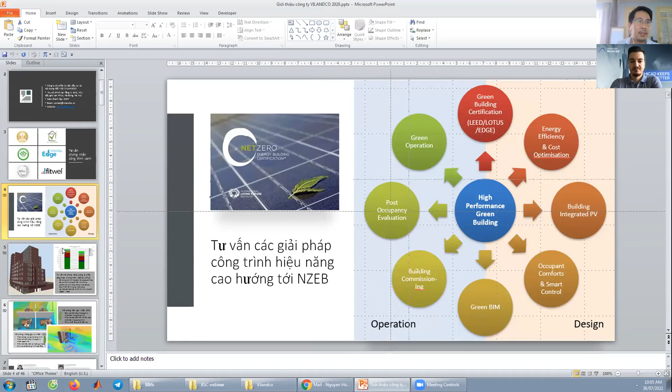Giới thiệu qua thôi, bởi vì buổi ngày hôm nay xin phép để dành cho phần trình bày của chính hãng.

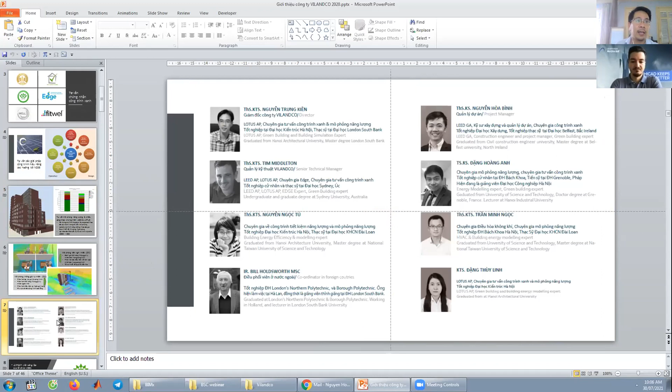Mọi người có thể thấy trên màn hình anh Nguyễn Trung Kiên là giám đốc của công ty, cũng là một người khá có tiếng trong lĩnh vực công trình xanh. Anh đang là một trong những thành viên sáng lập cho tổ chức VGBC, tham gia vào rất nhiều hoạt động về công trình xanh của Việt Nam.

Trong các dự án công trình xanh của công ty đã thực hiện, mọi người có thể thấy có những công trình của Capital House, của Sao Thái Dương và nhiều tổ chức khác nữa. Chúng tôi có rất nhiều đối tác trong lĩnh vực này, nổi tiếng như Heerim, như Obayashi, và các đơn vị khác.

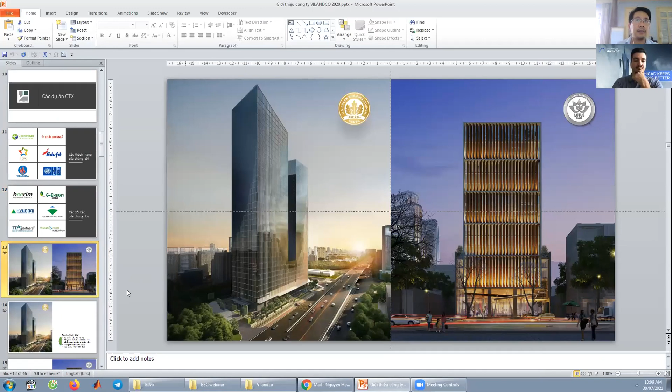Đây là một số công trình mà phía công ty đã tư vấn cho chủ đầu tư, áp dụng thành công và đã đạt được các chứng chỉ. Mọi người có thể thấy đây là tòa nhà North Star ở khu vực Liễu Giai, Hà Nội, vừa mới được chứng chỉ xong.

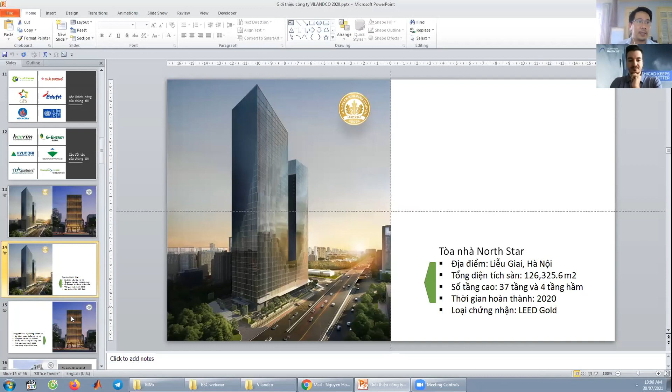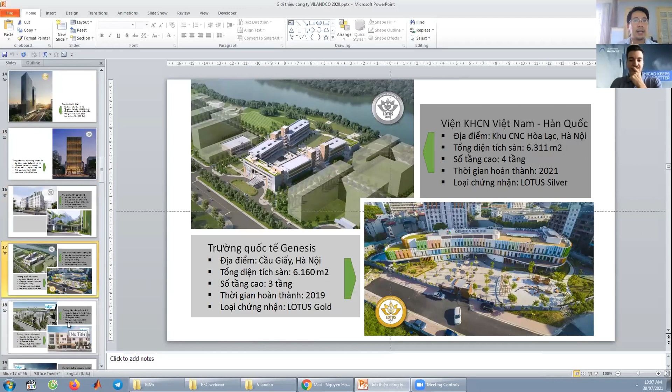Hay là Trung tâm Lưu ký chứng khoán Hà Nội ở đường Hoàng Quốc Việt, đây cũng là một công trình thành công của công ty. Ngoài ra còn có rất nhiều các công trình khác. Để tiết kiệm thời gian cho buổi họp ngày hôm nay, tôi xin phép chỉ show lên trên màn hình. Mọi người có thể tìm hiểu thêm thông tin ở website của công ty là vilandco.vn.

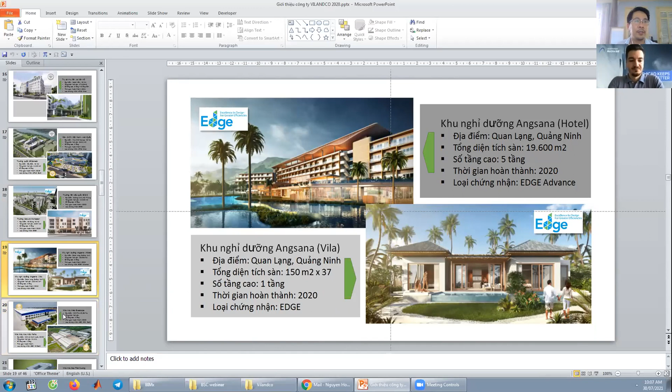Ngoài ra, bên cạnh lĩnh vực về công trình xanh thì Vilandco còn có một mảng công việc khác liên quan đến phần đại lý của một số phần mềm, đại lý phân phối và đào tạo một số phần mềm. Nổi bật trong đấy có các phần mềm của hãng Graphisoft như là Archicad, BIMx và BIM-Cloud cho lĩnh vực công trình xanh và tính toán năng lượng cho công trình.

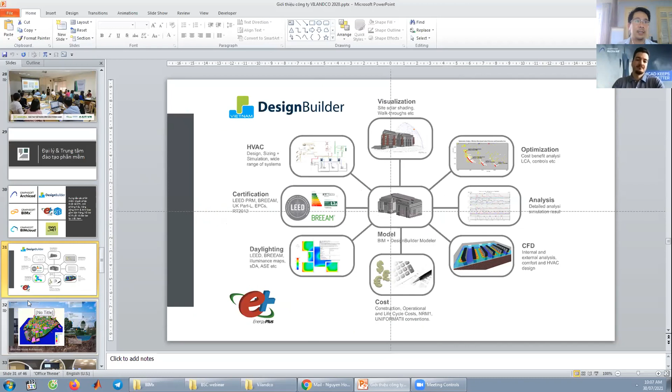Thì có các phần mềm như Design Builder hay là Energy Plus. Phía công ty vừa phân phối vừa có các chương trình đào tạo cho các phần mềm này. Xin phép đi rất nhanh qua lĩnh vực này thôi.

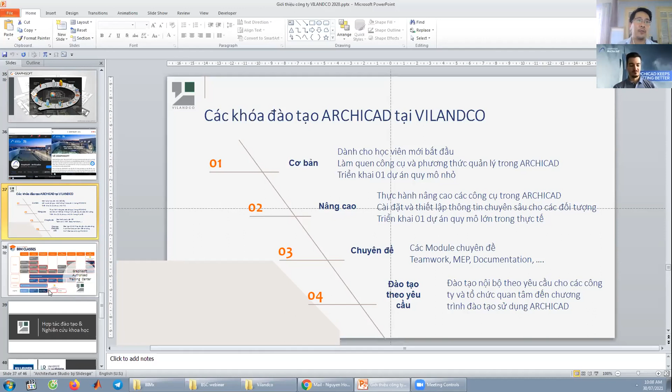Ngoài ra công ty cũng có các khóa đào tạo liên quan đến các phần mềm như Archicad, liên quan đến phần mềm như Design Builder. Thông tin chi tiết vui lòng xem ở trên trang web của công ty là vilandco.vn.

Nói sơ bộ về công ty như vậy, để giới thiệu là chúng tôi có làm trong lĩnh vực công trình xanh, có làm trong lĩnh vực tính toán năng lượng hiệu quả và cả trong lĩnh vực về BIM cũng như các phần mềm về BIM tool như là Archicad.

Để không mất nhiều thời gian của buổi ngày hôm nay nữa, tôi xin phép sẽ nhường lời cho anh Sandor, chuyên gia của Graphisoft, về các yếu tố mà tôi vừa kể trên.

Hi Sandor. Hey, hello. Yeah, I've just finished a quick introduction of Vilandco's and the reason why we're here. You can take it from here. Sure. All the best. Let me share my screen.

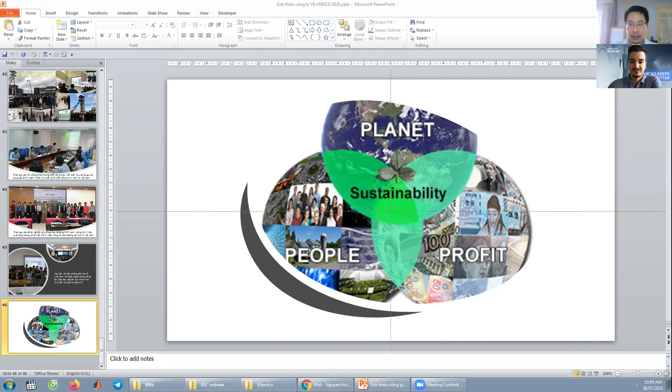Hello everyone, my name is Sandor. I'm a BIM consultant in Southeast Asia with Graphisoft. Today I would like to show you our green building design solution, what Graphisoft can offer in this field. But before we do that, I would like to show you the industry trends, the challenges, what is the incentive for us to do this green building design, why should we even care, and what is our workflow within our BIM solution?

Okay, so let's take a look at this. First of all, the incentives - why should we do this? Well, sometimes it's not because we want to do it, but it's just required. It might be required by the owner, because the owner wants to have their building certified, the project certified with energy certification. On the other hand, it's also possible that it's not required by the owner, but required by a local building code.

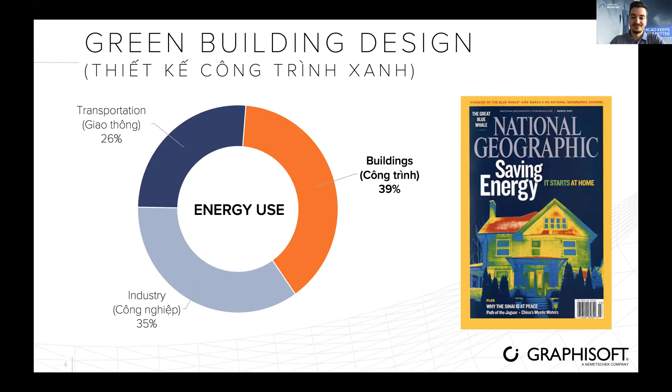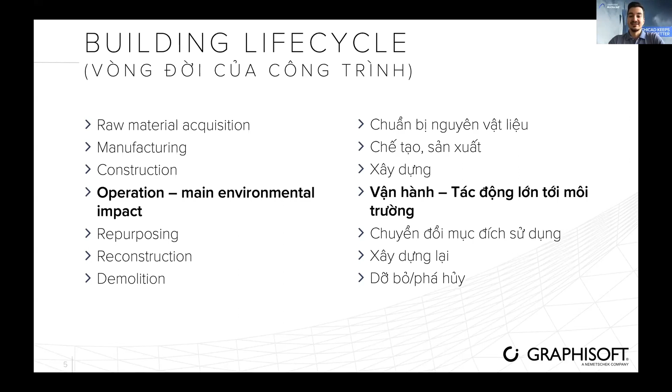If you look at the building's life cycle, there are different phases, and in each and every phase we have an impact on the environment. Whenever it comes to projects, especially software vendors, the perception is that we always focus on the design phase, how to model a building. But that's actually not the way to go. We have to look at the whole life cycle of the building because the environmental impact is there in every phase. Even when you purchase the materials, how they're produced, the mining, the processing, the construction itself impacts the environment. But actually the biggest environmental impact is through the operation. So it's very important to come up with a design that will affect the operation in a good way. And even after operation, renovation or demolition, these all have impacts.

Let's take a look at this diagram to visualize this. If you look at the cost, the primary energy, and the carbon dioxide emission, you can see that even at the investigation and design phase there are some small peaks. The largest peak is during the acquisition, when you buy those materials and they're processed. Then there's obviously a smaller one at construction, and even at operation and maintenance there are some peaks, significantly lower than what we have at acquisition.

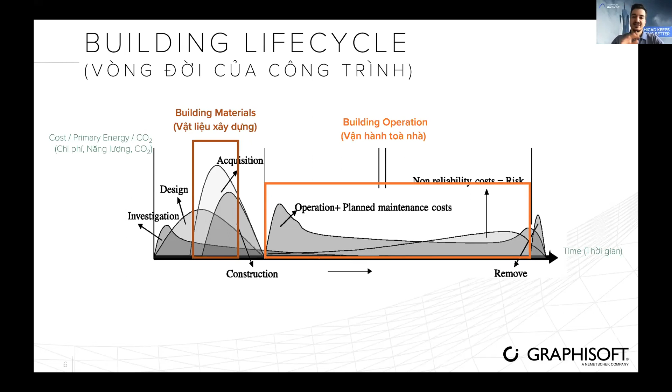But still, we want to consider the operation more. Why? Because what you see here is not to scale. If you really look at the actual timeline, we're looking at 50 years. In a 50-year time frame, these small peaks will actually mean much more than the one-time peak during acquisition. There's a term here, primary energy. I'm not sure if you're familiar with it, but it's a very important metric. I'll show you what this actually means.

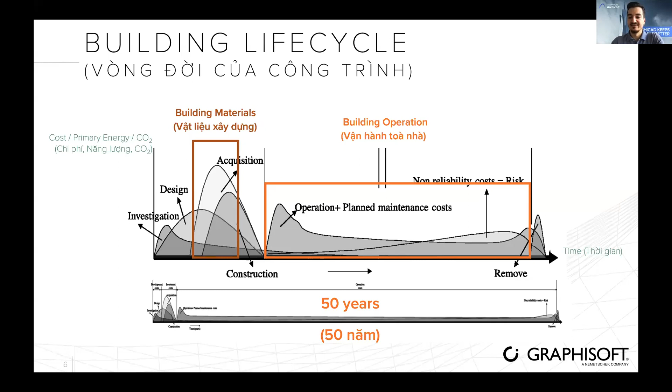All in all, I think our main mission with any kind of solution should be to support design decisions from the early phases. Why? Because in the early phases we have more effect. We can affect the design more, and we can affect the operation more, because we make the initial decisions. Also, when we make these changes in the early design phase, they cost less.

If you already have a completed project and then realize the operation is not sustainable, you have to make changes once the building is built, but then you don't have that many options, and all of them will mostly have a small effect and cost a lot of money. So our goal is to make sure that starting from the early phases, we can have control over energy efficiency as well.

Let's look at the building sector. According to the International Energy Agency, we can see two things. The bad thing is that the building sector is one of the largest end-use sectors in energy consumption, as you could see in the donut chart earlier. So we already knew that. The good thing, however, is that if we want to make a change here, with relatively small efforts we can achieve quite a lot, because this is one of the most cost-effective sectors when it comes to reducing energy consumption. So that's at least a good sign.

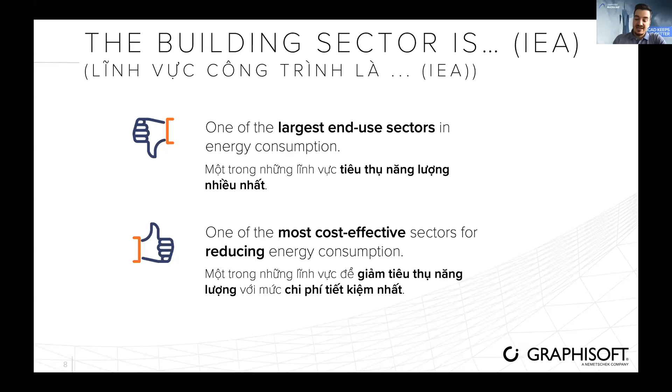Just a few words about the International Energy Agency. Why should we listen to them? This is basically an intergovernmental organization based in Paris, and they provide authoritative analysis and make policy recommendations on real-world energy related matters. So all in all, it's an international organization, and we definitely should listen to them.

And they also came up with different methods, or suggestions and recommendations, for how we can reduce energy consumption. So we already identified that it makes sense to deal with this topic, but how should we do it? There are three ways we can achieve that.

The first is that we implement regulations and codes. Local authorities, governments, and countries can request certification to make sure your building fulfills certain demands, and this can be mandatory. So basically this is something that the state, the government, or an authority demands from us.

Besides this, we can implement green building standards, basically guidelines for how our building can perform better. This is absolutely voluntary, so it's up to us if we follow these trends, guidelines, and methods, but it will definitely help reduce energy consumption. The third one is that if we're already following these green building standards and guidelines, we can also do a performance rating and have our building rated. This is also a voluntary action. So we have these three main means in our hands as a society, as a community, as humanity, to reduce energy consumption.

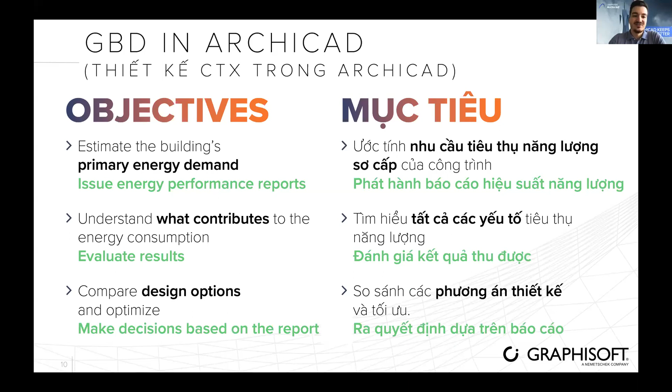The second thing is that if we look at this report, we can see a breakdown of the different energy consumptions and identify what contributes to the energy consumption. We can evaluate the results and decide which one has the biggest impact, for example. Once we define what has the biggest or smaller impacts, we can come up with different design decisions and optimize our solution, our design. So based on the report we evaluated, we can make decisions.

So this is what we should follow in a BIM tool. Now, in this case, I'm going to show you how we do this with Archicad.

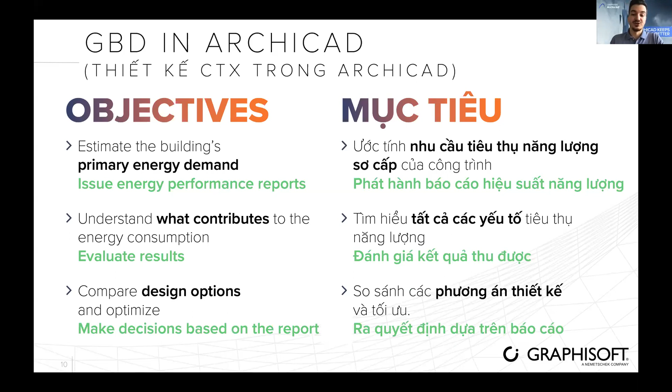Just a few things to explain more about primary energy. It's one of the best operational energy consumption metrics. So what does this mean? If something has a high primary energy demand, it means it's affecting the environment more than something with a lower primary energy demand. The primary energy is not considering only building performance, but also how the energy is processed, meaning there are energy industry losses.

That's how the energy is produced - for example, coal mining, the mining process itself. Or when you transport this energy, think of district heating, district cooling - the way energy is transferred on the way, there's a transportation loss. So basically what we get in the end is much less than what we had in the beginning. And then when the energy arrives at our building, even our systems have losses.

For example, you have a hot water heating pipe - if it's not insulated, there's heat loss through the pipes. Just a small example. Or when you do the air exchange, there's heat loss or unwanted heat gain in warmer countries, for example. So the energy demand of the building itself is just a small fraction of the primary energy. But overall, if we want to know the impact on the environment, we should be looking at the primary energy demand.

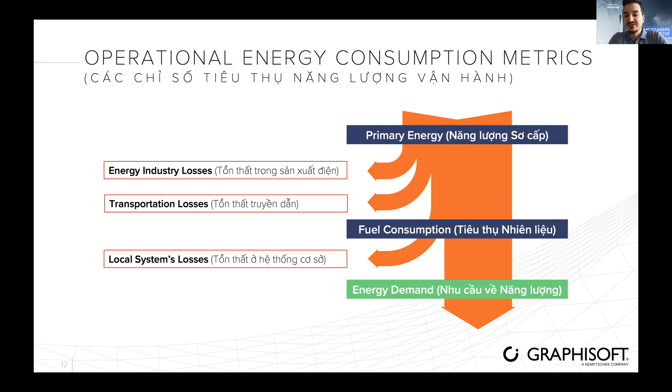If you look at the different phases and stages of the project, in each and every phase there is a need for sustainable solutions. I mentioned earlier that we'd like to make sure we have supported decisions from the early phases, but let's see what we're actually doing there. In the schematic, conceptual phase, what are we doing as architects? We do the massing, position the building, set the orientation, do the zoning, set up the spaces, and define some of the building materials - what structures we're using in this building.

And then at the design development stage, we're going to focus more on the efficiency.

So usually this is where we fine tune our design as a whole and create this low energy building design, the improved one. You may think, okay, now our job is done. But actually, once we move on to the construction phase, construction documentation phase, there are two occasions when we

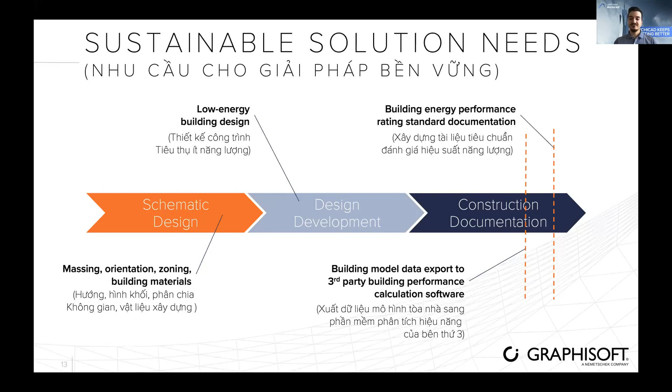Okay, so let's just take a look at the actual workflow. What is it that we do within the software, or within the design workflow? Obviously, the very first thing would be the model preparation. This is what the architect does.

This happens naturally. Basically, what do we have here? We have the spaces - in Archicad, we call these zones - and basically the spaces will make sure the spaces are already there, because this is how we can check that they are fulfilling the architectural program as well. Once we have the spaces, so the building envelope, the structures, then we need to make sure that this model, which could be anywhere in the world,

is somehow related to the environment and the location that we're working with. And we need to put in some energy related data - what do we want to achieve inside the building, and what are the outside requirements, for example? Once we have these things, so once we have the BIM model, we have the energy related information,

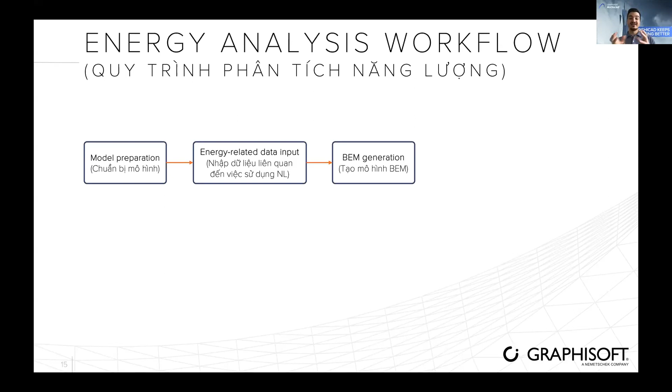then we should generate a building energy model. So we had the building information model, and then we need to generate a building energy model for the energy analysis. Once this building energy model is ready, then we can evaluate the performance.

And what do we want to achieve with this? How do we set our model? How do we set up the structures first? What do we define here with the energy related inputs? It's always because we want to fulfill some requirements, right? So even if there is no requirement for ratings, there's always a building code requiring that this building should perform this way.

So usually at the first evaluation, we are fulfilling the requirements of what we call the baseline design. Basically, this is the bare minimum that is usually required. And if we fulfill that with certain design decisions, we can improve that and make our building better.

So what can we do? We see the baseline design performance, and based on that, we can come up with an improved design. This can mean architectural improvements, changing the shape of the building - I will show you some of the options later on - or I can change the building energy model directly. Anyway, once I created my improved architectural design, I just regenerate the improved building energy model.

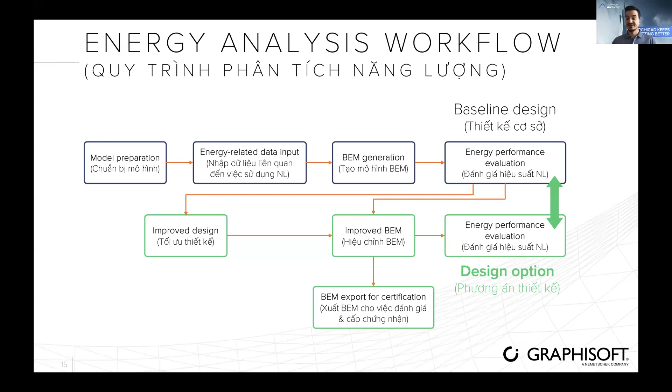Okay, so let's go through these steps. What can we do in case of, for example, the model preparation? You can see there, this is a small building, but it's a very nice example, and I will be able to show all kinds of aspects of our energy analysis workflow.

This one is a relatively detailed model, but we don't have to go into every single detail when it comes to energy evaluation. We can do it gradually. So we can do energy evaluation in the early phases, and as the building gets more refined, we can get more detailed on energy analysis as well.

So you can see here the building itself. Our first goal is to filter this building, because not everything is important when you look at it from an energy evaluation aspect. What is important is the envelope, because that connects the internal space and internal requirements with the climate outside. So we need to make sure the external envelope is given, but for example, furniture is not going to affect the energy performance.

In a BIM software, it's very easy to create different views of the same model. If you're using 2D CAD, you cannot really do this, because for different representations of the same content, you have to recreate the content. In a BIM model, this is good because we have one source and we can look at it from different perspectives and points of view.

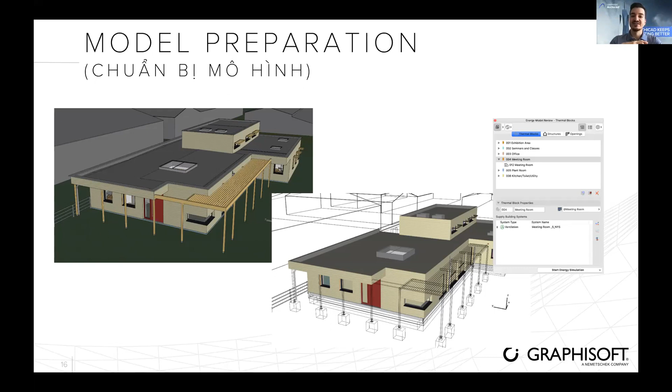So we can create these thermal blocks. Again, the architect can do this for the energy evaluation.

Moving on, we can have the environmental inputs. What is the climate like at the location? Archicad will automatically download climate data from the internet based on the location settings of your project. But if you don't find that good enough, or if you have your own preference, you can get climate data files from the internet. There are local sources and international sources. You can import that, and it will define how the environment is like.

How moist the climate is, what is the temperature distribution, precipitation, how windy it is - and besides that, you can also set up the immediate environment of your building.

In this first dialog, for example, you can set what is the wind protection, or if you have horizontal shading, what type of soil you have, what is the reflectance on the soil. Just think about this: if you have a brighter soil type, that is going to reflect the heat, and that is going to be a hotter environment around your building. So you can set up these values as well.

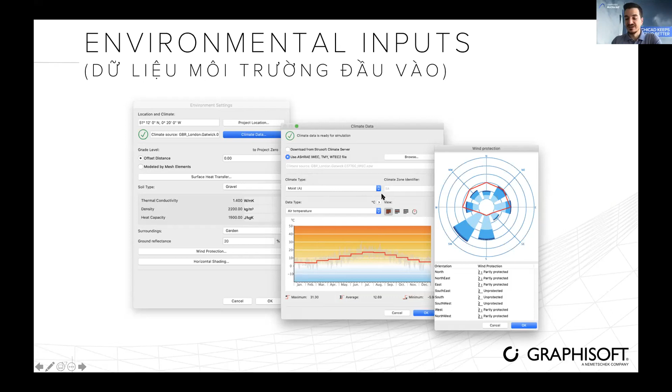As I mentioned before, we have the spaces, and we can create these thermal blocks. Here's where you can see the actual thing for the thermal blocks. You can have as many thermal blocks as you want, and as many zones and spaces in the thermal blocks as you want. Again, the good thing is that these spaces will already be there because of the architectural design.

Because you have a program, you have to fulfill a certain GFA floor area, and you have certain amounts for the different functions that you need to provide in the program. So these different types of spaces will already be there. For example, if you have two of the same kind of zones, you can put these into the same thermal block because they are located in the same position and should work and behave the same way.

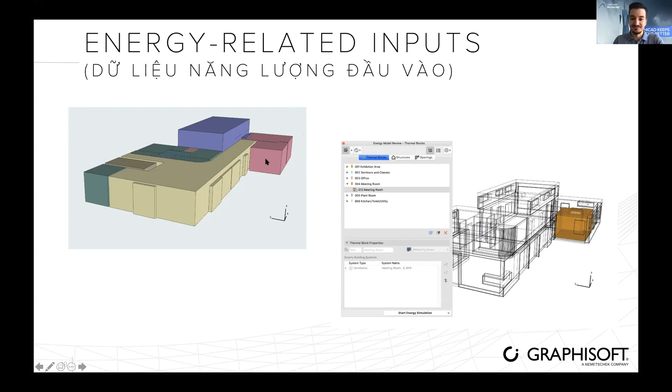So we put together the thermal blocks, but then we need to define what is the function of the thermal block. We know that these spaces are going to be meeting rooms, for example, but what does that mean that we have a meeting room?

So we can set up these operation profiles, which set the internal requirements. And you can see that even in case of a meeting room, these spaces work differently depending on which day of the week we are.

For example, on work days, we need the meeting rooms to have a different climate than during non-work days, during the weekends. So here you can go into the details and say that this is what is the work day, from Monday to Friday all year. What does it mean that we have a work day? In a work day, from 7 a.m. to 6 p.m., we should be having a minimum of 20 degrees and a maximum of 26 degrees. So this is what we should fulfill.

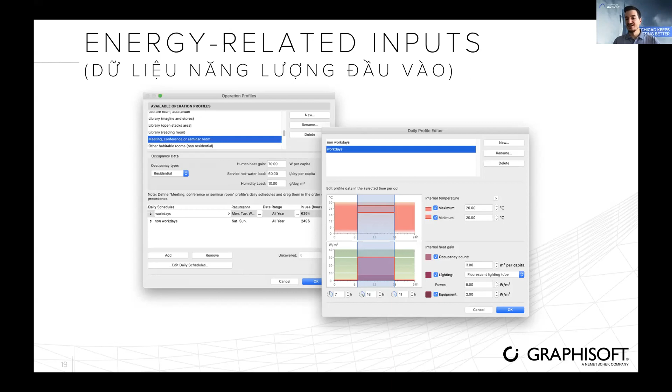And obviously, besides this, we have internal heat gain. There are people inside the space who are breathing, sweating, basically producing heat. There is also equipment, building services, office equipment, lighting and electric equipment, which all generate a type of heat. So we need to basically later on see if this extra heat is good for us, or if it's bad for us.

So when it comes to this BEM model, the building energy model generation, there are basically two things. One thing is what Archicad can do. Archicad will take the geometry that you built, consider the building materials and the windows, doors, the openings that you defined, and based on this is going to generate the building energy model, considering these space boundaries as well. So this is what Archicad can do.

The architect's responsibility is to make sure that the structures and the openings are correctly set and improve them. And regarding the openings, we can also run solar analysis, and based on the result of those solar analysis, we can decide whether we should improve further our model or if it's okay as it is.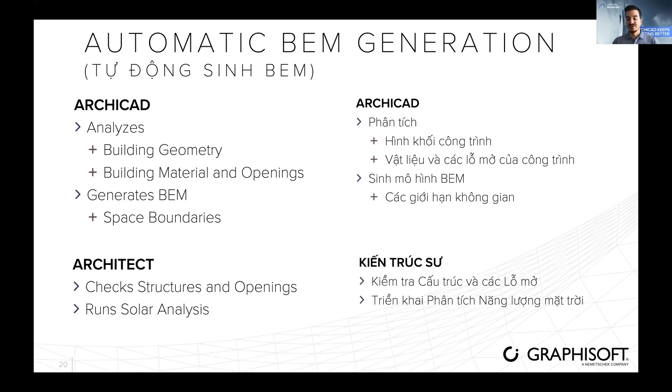So let's take a look at the structures and the materials. Further down on this energy model review palette, this is the next page. You can see we saw the thermal blocks before, but the next page would be the structures. In this small building, these are the different structures that you have in the model, and they all have certain values, for example the U value, which is representing the thermal transmittance or infiltration value.

Basically, this is telling you how solid the structure is. Lightweight structures have more infiltration because they have gaps. A concrete structure has less infiltration because it's basically one solid thing that you cannot penetrate. There is also solar absorptance, how much energy it is absorbing from the outside, for example.

So these are values that can be very detailed. And obviously you can say, how would I know all these things in the early design phase? Well, the good thing is that you don't need to know these. I mentioned in the beginning when I showed you the building that this is already a detailed model, but in the early design phase, you can just override these values.

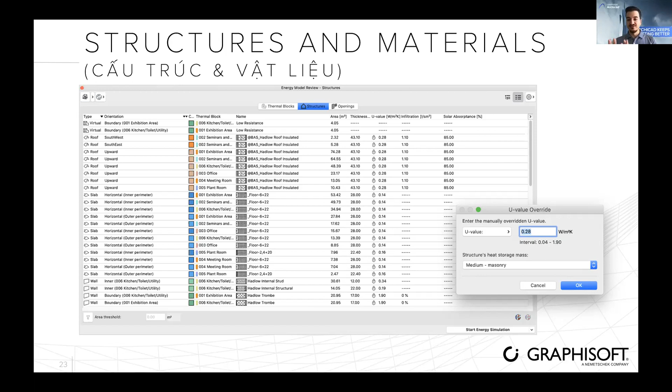In the beginning, we don't know how it performs, but it should fulfill this requirement, so we just put in the requirement. We can do the same thing with the openings. All the windows and doors facing the exterior can be defined. You can set the materials for the frames and for the glazing, and they're going to have a certain combined value. Whichever values you choose, that's how it's going to affect the performance.

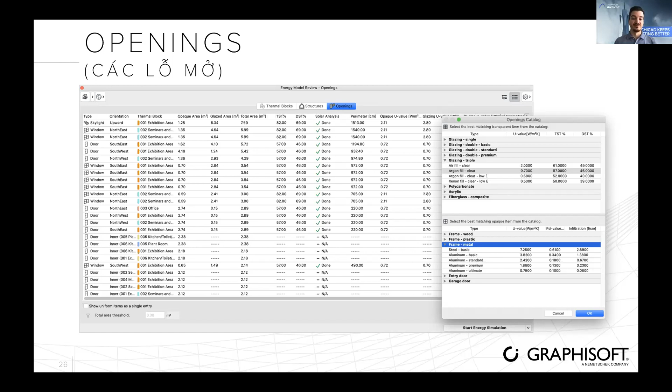Okay, so those were the structures, but let's move on to the building systems. Obviously the building systems really affect the performance, but we are in the early phase and we are architects, so how should I know what the building system is going to be? Well, the good thing is you don't have to know it yet. What you can decide as an architect is the actual types of systems.

Are you going to have heating? Are you going to have cooling? Are you going to have ventilation? At least this you can still decide. The details should come from an expert. So how do we tackle this? In the design phase, you can say not yet specified, meaning it is just going to fulfill the requirements.

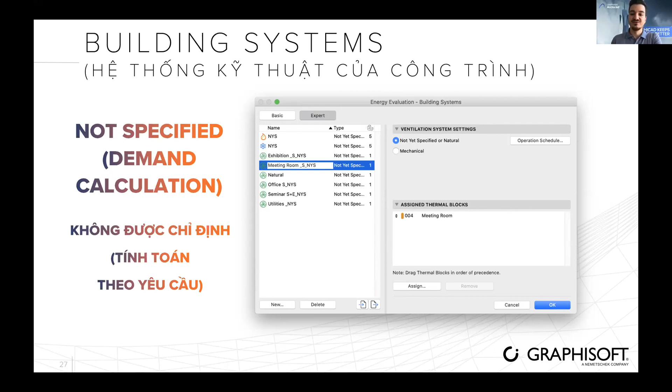Previously in the operation profiles, we said our meeting rooms need to be within the 20 to 26 degree range. If you set up a cooling or heating system to not yet specified, it means it's just going to keep between 20 and 26 no matter what. This is good because all the results we get in the energy evaluation will be used for the demand calculation. So we know this is the amount of energy needed to fulfill the requirements. How are we going to fulfill it? We'll do that later. But just by setting not yet specified, we can do a demand calculation.

Moving on, we can run the energy report, energy evaluation, and create an energy report. Here's an example. On the left side you have different chapters of the report, and you can choose whether to include those chapters or not, so this makes it a configurable report.

It's very interesting what you can see, for example, in the project energy balance. You can see that the solar gain is quite high. Remember this is a European project, so during the summer there is a rather large solar gain. Based on this, we should consider applying some shading, because this is the bigger portion, so somehow we could work on reducing the solar gain.

Okay, heating - again in Europe, November through March we're using heating because it's wintertime, no surprise. But even during that time we have a little bit of solar gain, which actually helps reduce the heating needed. In the Southeast Asian context this would be the opposite way around, but you can see the ideas you can read from these. Also, human heat gain is basically the same throughout the year, and lighting and equipment are also the same, meaning the building is used pretty much the same way all year.

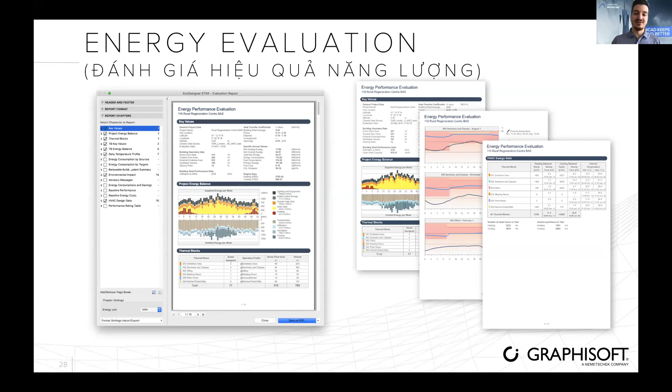So basically we said that whatever we use is going to fulfill the requirements - this is what they need to fulfill. And now later on, we can put this information back into the system.

Okay, so let's see the optimization workflow. We run this first version, so we know that this is going to happen if we just fulfill the basic requirements. We already did this - we created a base building without specified systems. We ran the energy simulation, and based on that we could define the demands, setting the demand calculation as well.

So now we're actually going to review the energy performance. That's also what we did when I explained that this is where we have the heat gain, this is where we have the transmission. So we did basically all these three things. At this point, what we need to decide is how we're going to improve this.

So we have to investigate the optimization options - what is feasible, what is doable, what works within this particular environment, what doesn't work, can we afford it, how soon it can be implemented, and so on. Once we identify these different options, we should also investigate how well they actually work in this situation, so that's when we can do sensitivity analysis. Okay, so what does this mean?

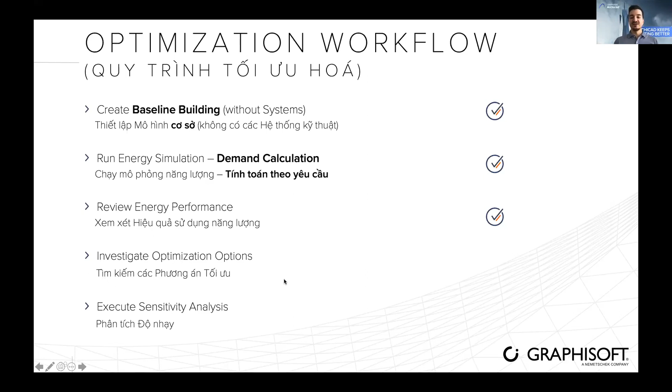Basically, you can do this all at once. So if you say yes, I will have to use shading, I will have to use better structures, I will have to use renewable energy, okay, that's fine - we can apply that all at once. Basically, this is what we define as a project-specific low energy solution set. These are the improvements all in all.

And actually, there can be three kinds of improvements. One is what the architect can do very simply, by changing the design - saying we're going to have smaller windows, or shading in front of the building, or we're just going to rotate the building slightly for a different orientation. Or we can change the building systems and replace them to make them more efficient, or we can apply renewable sources as well. So these are the three ways.

Once we decide how we go forward, we're going to define the building systems with the actual values based on the design data, and basically now our final building is done. Then we can run the energy simulation again, and this is when we have the design version, which we can compare with the baseline building. So we can see overall how much is the difference, how good is the improvement.

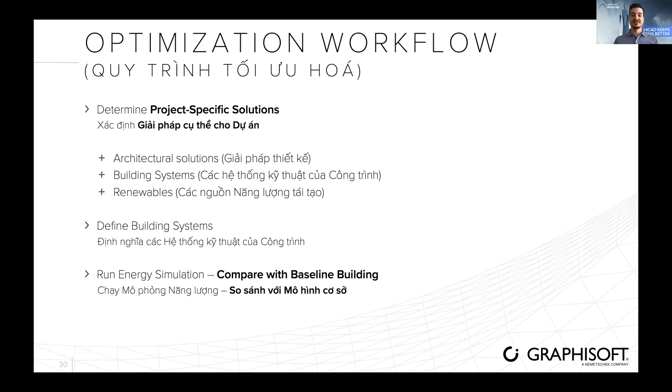Okay, so to give you some idea, what are the approaches when we want to optimize? There are two approaches, active and passive, when we want to optimize our building.

Active optimization is when we ignore the environment and just take the building on its own. Architecturally, what we can do is minimize the transmission - change the shape, improve the structure, or make sure there are less gaps around the building so it's more airtight. Solar heat gain is reduced, and we are using different energy resources.

Passive is to cooperate with the environment and make sure that we are using renewable energy sources. Typically it means solar energy, but you can also think of heat recovery - again, more related to different climates. When you have used air that's already heated, if you take the fresh air, you can have a heat exchanger and use the used air to warm up the incoming air. That means you save on heating because you preheat the incoming fresh air. So that's also a passive way of optimizing your project.

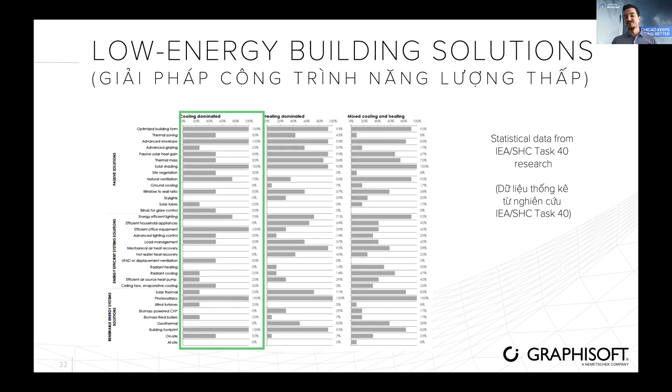You can use the defaults if you're not familiar with these numbers, or you can do some research on some rules of thumb. But basically what you can decide is to say, okay, we're not going to use fluorescent lighting, but instead we're going to switch to LED lighting. Obviously that is going to have less energy demand.

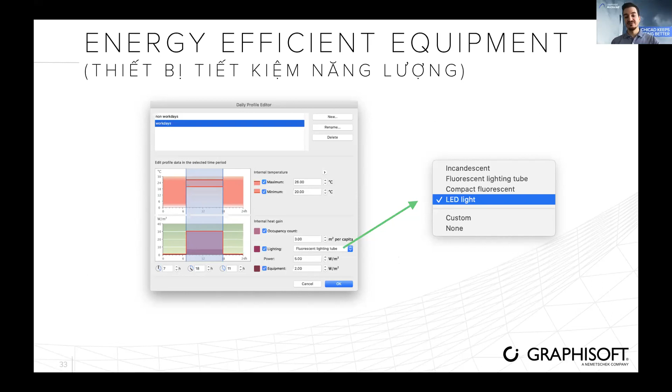There we have composite structures with building materials. And these building materials are actually not just 2D representations, not just a hatch that says this is going to represent brick or this is going to represent concrete. These building materials have actual physical properties - for example, there is the thermal conductivity, and that's what you're actually going to use to calculate the actual U value, the actual heat transmission of the actual structure.

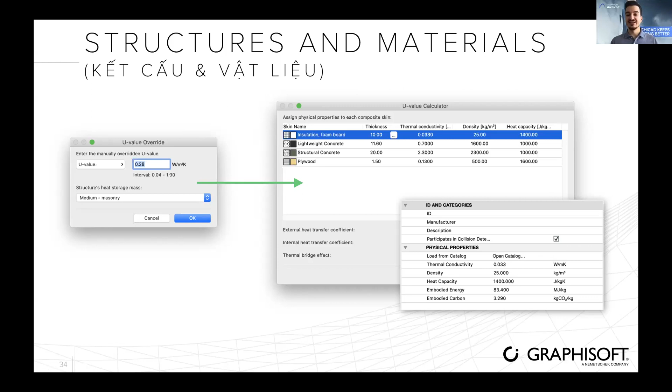So you can see that if you're using this type of structure, then there is an actual calculation - does that fulfill the 0.28 or not? If not, then we can say, okay, maybe we should increase the thickness of the insulation. And let's see, in real time, you can see what is your actual U value.

But there's even more, because we can consider even more details when it comes to the energy evaluation. You can see that under the structures, besides the structures, we can see what is called a thermal bridge. So what is that?

Basically, when you have your building, you have typically the openings. As the openings are installed, there are usually small gaps, and these are critical parts because you have to make sure that the heat insulation is continuous, so there are no gaps where there could be heat transmission. In Europe, it's very important because if you have a gap, then the heat from the inside will just go out through those gaps, and that's a heat loss.

But the reverse is also true here in Southeast Asia. You can get unwanted heat gain, because if you have gaps, the heat is going to come in, it's going to be warmer inside, and then you need more cooling. So the heat is not just coming through the surface, but at the gaps as well. And if you have a huge building with a curtain wall all around it, that's a huge perimeter where you can have potential gaps and potential heat transfer.

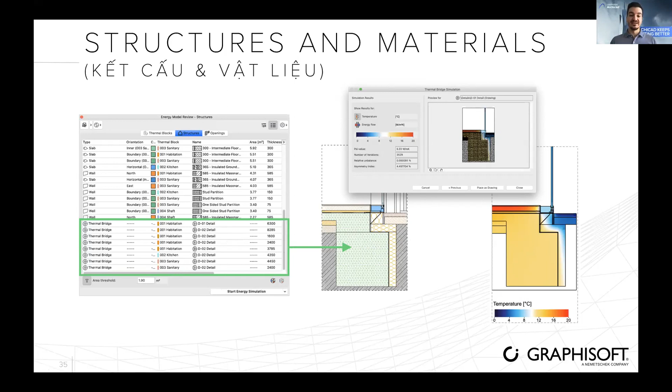It will add to the solar heat gain.

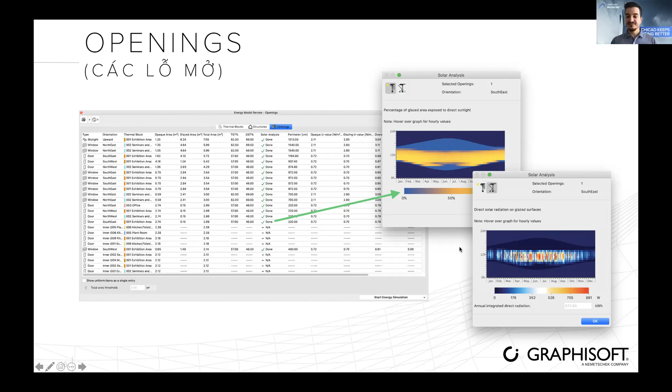In Archicad, you can use teamwork very easily, and you can connect MEP engineers to your project, so they can also set it up for you, changing the expert settings. This is just an example; they can go into all kinds of details. They know, based on the demand calculation, what kind of equipment should be used, so they will just put the equipment characteristics into the system settings.

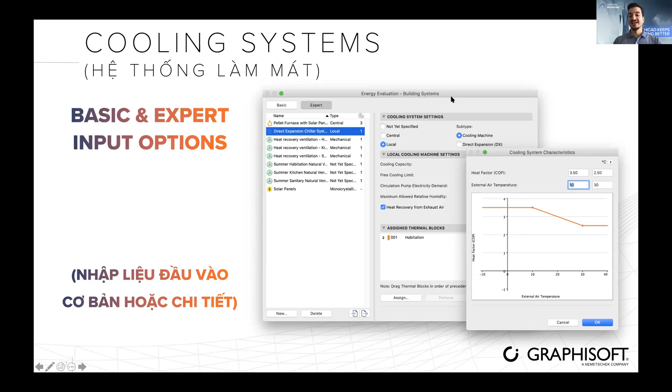But if you don't have that, you still can go with the basics, and you can have an estimate for these inputs.

The operation schedule should be synchronized with the operation profile. Because in the operation profile, we said that from 7 a.m. to 6 p.m. we should have this temperature. So that also means that our air handling should also work in the same time frame, from the morning till early evenings.

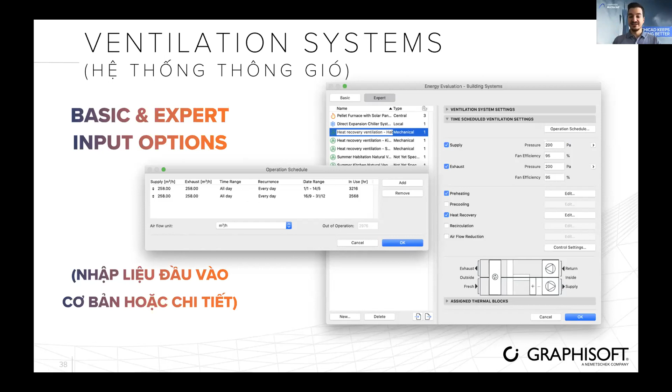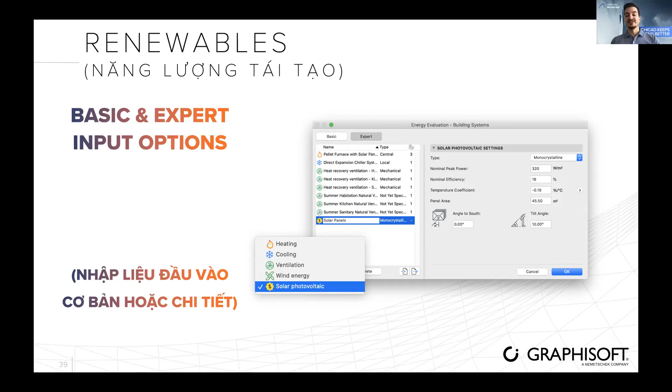Okay, there are two very interesting settings as well. This is mostly needed at the end of the process. You can ignore them, but if you incorporate them, you can also measure the savings. So the first one is the energy source factors.

Here you can define the distribution, the proportion of the different energy types or resource types that you're using for electricity production, for example. Or here you can see it's like a multiplier for the actual building demand, and the relation between that and the primary energy.

You can see that for natural resources, basically there is no loss. If you're using oil, then the primary energy is going to be more than the actual building energy demand. So you can use the standard values based on the local conditions. If you don't have coal power plants but you have nuclear power plants, then obviously you would go for more nuclear energy and less coal.

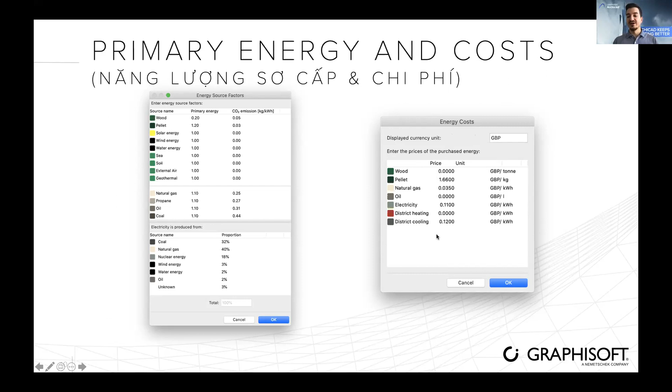This will affect the primary energy demand because it also defines the efficiency of the local systems, and it's also affecting the cost because different sources have different costs. This is what you can actually set up here, the actual energy costs - how much does this energy cost in your country.

I haven't mentioned it, but the building is a so-called passive house. It was a very special construction because it has like 50 centimeters of insulation around, and very efficient shading and building systems. That also means it has heat recovery as well. So all in all this allows us to have a very low amount of yearly maintenance costs.

Okay, this is what you can see from the report. And then you can also have the cost of the renewable energy, and also here the primary energy and the carbon dioxide emission as well.

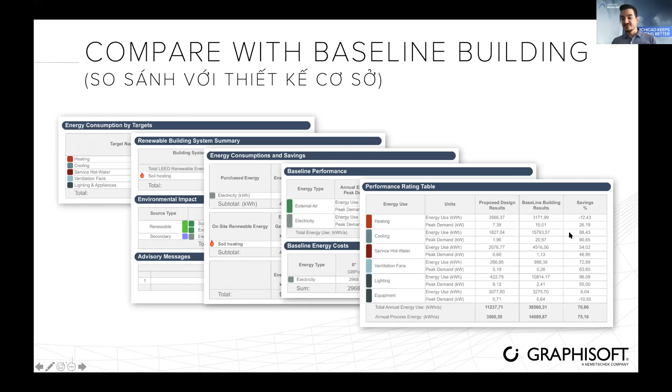This is also very interesting, the performance rating table. Here you can see the original design and the proposed design. In case of cooling, we saved almost 90%, which is a huge saving. In case of lighting, when we applied LED lighting, that meant 95% saving. On the contrary, heating has an actual loss of 12%. But because it's a passive house, the heating in general had very low demand. So we can say that the 12% loss is far outweighed by the 90% saving. Even though here we have a little loss, there's much more that we gain with these savings.

So without a BIM model, without the energy evaluation, you cannot evaluate this.

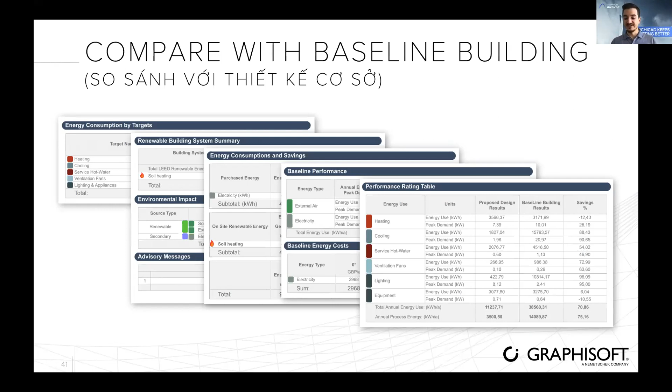How can we get this to the professionals if we want to do certification? GBXML is one of those open formats that is commonly translated and understandable by energy evaluation tools. On the right side, you can see what is in Archicad, and this is a GBXML viewer. This is what we export to the energy experts, and then they can do their actual calculations and certification based on that. You can consider GBXML as a universal format. In case of model exchange, IFC is similar to that among BIM applications, or a more common example, PDF is something known for everyone, a generic file format. So GBXML is the same in terms of energy analysis.

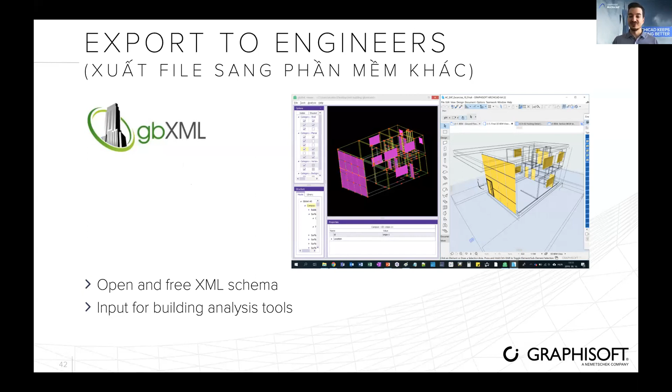There's also PHPP, Passive House Planning Package, which is a German solution and a German standard. Basically this is an Excel sheet, and we can provide the input for this Excel sheet. It has less relevance here, but it is also one of the standards, so I wanted to mention it as well.

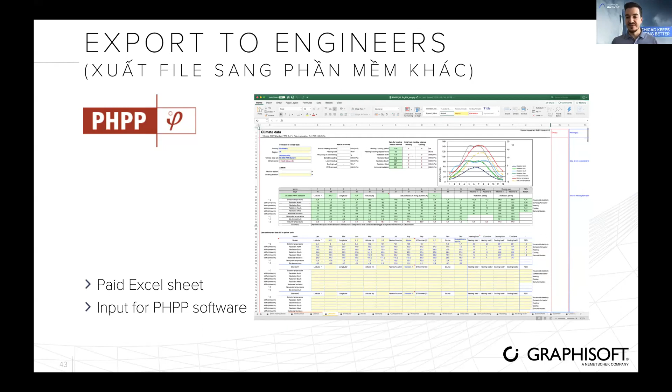So we have all kinds of results. They look very promising, they are really good, but can we trust these results?

I mentioned before that we are using the Ashrae standard for the simulation, so the simulation itself is certified by Ashrae. What is Ashrae? It's the American Society of Heating, Refrigerating and Air Conditioning Engineers, a technical society that develops and publishes technical standards and recommendations to advocate sustainable development. They describe the technical aspects for a reliable simulation. This Ashrae standard means there is a standard method for how energy evaluation tools are tested, and here are the results of different tools. If the tool conducts the evaluation and the result is within a certain range, then that solution is certified. In this case, EcoDesigner and Archicad are the red line, and here EcoDesigner is the red result. It's pretty much within range, hence it is an Ashrae standard compliant simulation.

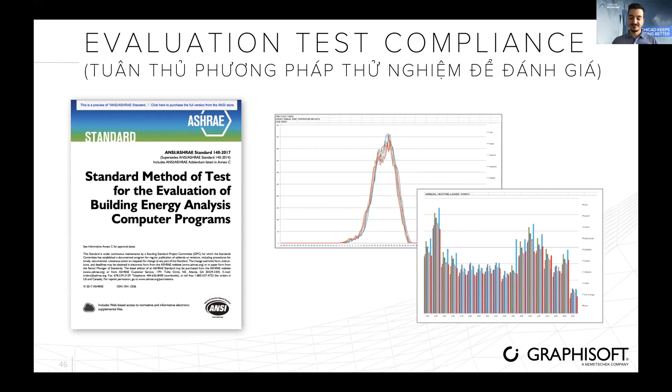So where else is Ashrae used? It's basically a testing method referenced by most major sustainable design regulations. All around the world you have organizations and rating systems that support and refer to the Ashrae standard. Just to give a few examples: DGNB and Passive House from Germany, Green Star and Nationwide House Energy Rating Scheme from Australia, LEED from the US, CASBEE in Japan, BREEAM in UK. They all refer back to the Ashrae standard with their own certifications. So I think we can say we can rely on the results.

So all in all, if we go back to the original mission, I think you can clearly see that we support the early design phases, and by this we can make the best design decisions. We can compare them, evaluate them, and eventually this will have effect through the whole life cycle of the building, especially the operation and maintenance. So this brings me to the end of it.

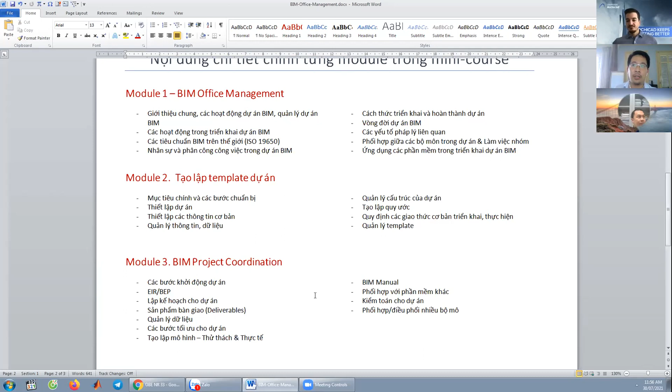Chương trình này cũng đã được lên kế hoạch với ban chỉ đạo BIM quốc gia và đang có được sự ủng hộ của rất nhiều cá nhân và các đơn vị trong xã hội, vì đây đang là một trong những yếu tố vẫn còn khá mới ở môi trường nước ta, tạo ra một số rào cản nhất định trong việc ứng dụng BIM vào ngành thiết kế và xây dựng.

Thì xin phép là hết phần trình bày chia sẻ của mình.